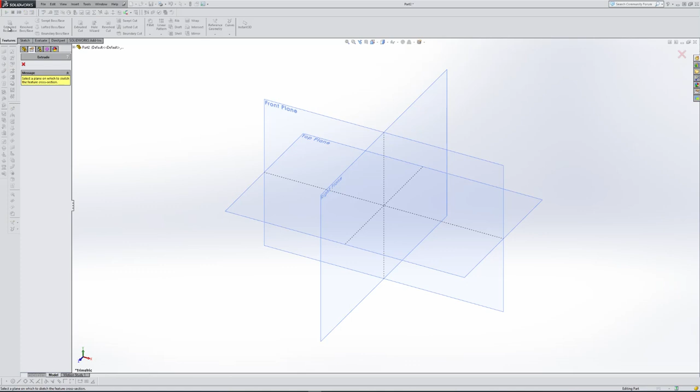First things first, we want to start with an extruded boss base, and I want to select the top plane. Right in the top plane, I'm going to grab a circle command. I want to place a circle about in that general area, and I want to make that one for construction.

Now I want to add 3 more circles. I'm still in the circle command. The next circle I want to add is right up at this top node. I'm going to place one here, somewhere in this general area, and then somewhere in this general area as well.

Now what I'd like to do is add some relations. This one is still selected as baby blue, and then I pick this circle and then this circle here, and I want to make those equal to one another. I also want to add another relation between this one, and I want to make those horizontal. So when I make them horizontal, they're going to force themselves around this way.

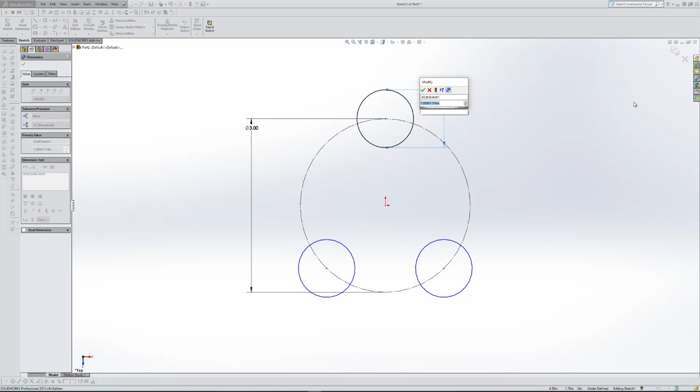So I want to add some dimensions to this. The reference circle is 3 inches. These pads were 1 inch, and now they're 120 degrees apart. I pick this circle, I pick our origin, and I pick this next circle, so it selects the center point of each of them. I want that to be 120 degrees, which keeps our location.

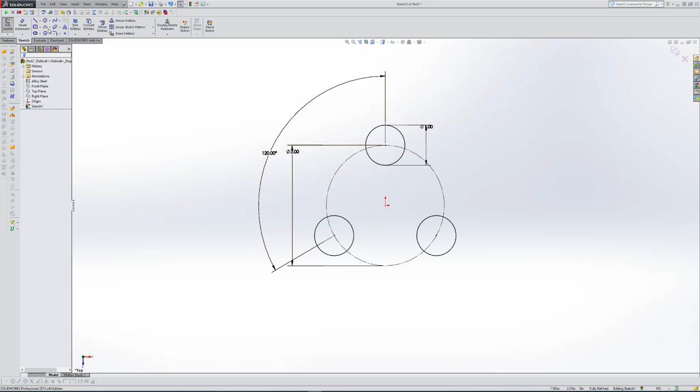So now we've got 3 individual features out here - 3 individual sketches, or 3 individual areas that we would be able to extrude from. But I want to add some more geometry to it.

Let's come up and pick another circle, and I want to draw it in this general area, and then this general area. Now let's add some relations to those. This one's still baby blue, it's already selected. I'll pick this one and pick this one, and I'm going to make those equal.

Now I'm going to work my way around clockwise. I'm still in the add relations command, so I want to pick this first circle, or second circle that we drew, and then this one. I want to make it tangent, working my way around clockwise. If I pick something completely independent, it selects what we did and goes on to the next thing.

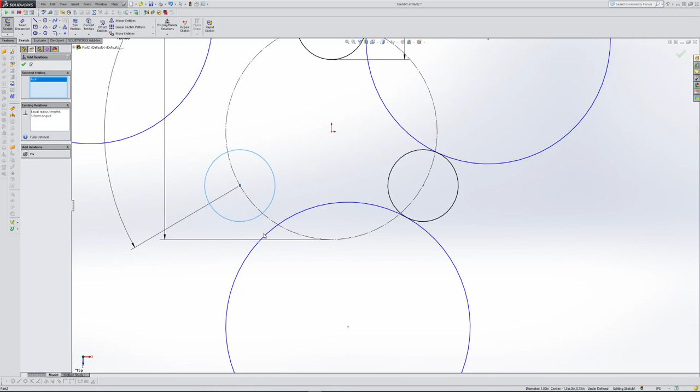I want to make this one tangent as well, and we continue to work our way around. So that one tangent, and then we want this one and this one tangent, and then this one and this one tangent, and the last relation is from this circle to this circle as tangent.

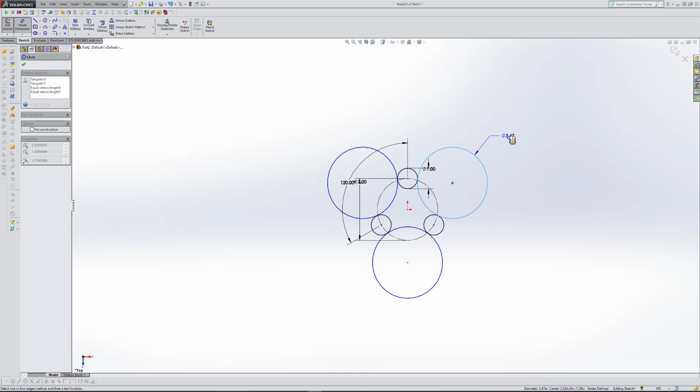Now we're not fully defined, so I think we need one more dimension on here. Select a smart dimension - best to remember this was a 3-inch radius as well. I'm going to pick this circle and make it 6 inches in diameter, so we'll have that 3-inch radius. So our sketch looks something like this.

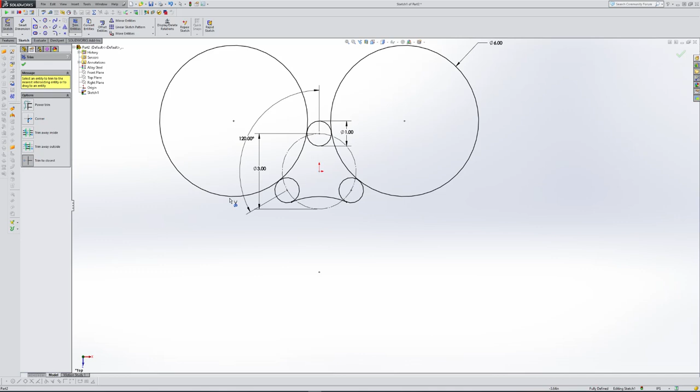This is kind of a mess over here on this side, but we can get the idea of what we're doing. So let's trim some of these features off. So I'm going to come up and select the trim command. The one I like to use the most is trim closest. It just seems like it works best for me. So I'll select that, work my way around clockwise, and pick those.

Now when I zoom way in on this thing, I want to pick these inner portions of these circles, because I only want one enclosed sketch profile. I'm going to work my way around clockwise. If you look here, even this little reference bolt circle, it allowed me to trim here as well. So it's used as some construction geometry, so it kind of helps you trim things off if you need them. And in this case, it added a little bit of work.

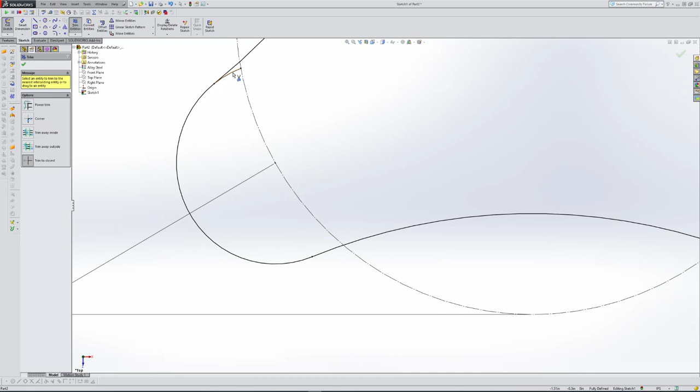So I want to select this, trim it, trim it. I like working my way around clockwise. Trim it, and then trim it, and trim it. So now we have one closed profile. So we're good to exit our sketch, and we want to extrude this material. So let's make this extrusion 0.25.

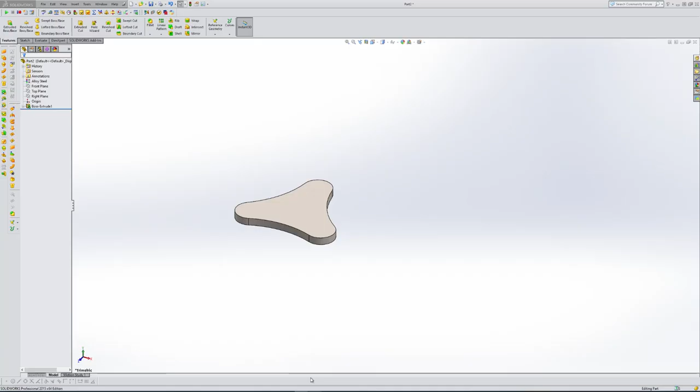Then the next thing that we had was these pads on here. So we look at this, and our pad is 0.375 thick, and it's also 1 inch in diameter. So let's come up, and we want to select extruded boss base. I want to pick this top surface. It should orient normal to you if your settings are the same. So I want to pick this face. I'm going to tickle that edge, place a circle out here, tickle this edge, find my center point, place it there, tickle this one, find my center point, place it, and now I want to add a relation.

So this one is still selected. I want to add this one, and this outer edge, and I want to make all of those equal. So we should be fully defined, and we are. So I look down here, and we are fully defined. It looks like we're here as well because everything went from blue to black. So when I exit this sketch, these pads should be increasing. So we already extruded material 1/4 inch up, and we want to make sure that we just add 0.125 to it to give it our 0.375. So we go ahead and accept that.

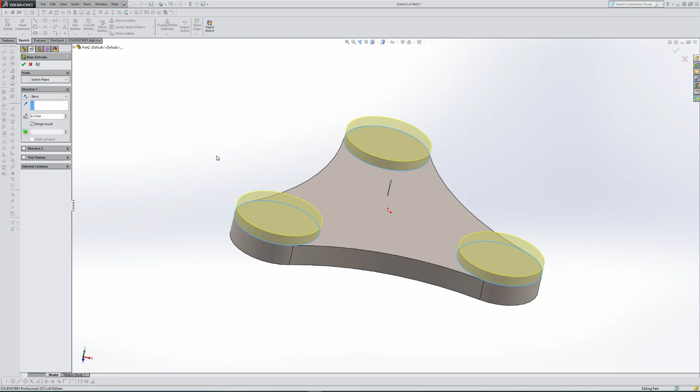Now the next thing that we can do is this boss feature on here, like this big tall portion of it. So dimension wise, it looks like it's 1 1/4 inch in diameter, and it looks like it's 1 3/4 inch from the back side of it. So we got 1/4 inch, so we really just need to add 1.5 if we start on this top surface.

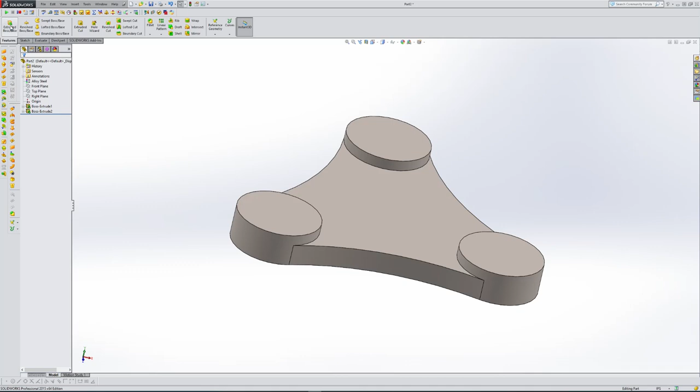So let's select extruded boss base. I'm going to pick this top surface. I'm going to pick a circle. I'm going to place it here. I need to give it a dimension of 1.25. We're fully defined. We're ready to extrude. So I exit my sketch. So instead of it being 0.125 here, this time we want it to be 1.5. So that should give us an overall height of 1/4 inch plus 1.5 at 1.75.

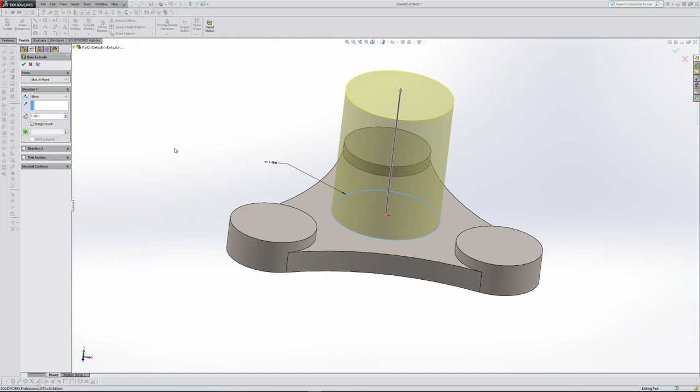Alright, so now we've got these holes that we want to put in here. So let's come around and take a look at this. So we have a 0.4375. I know that's fractional, so it's going to be 7/16 of an inch. Here in the US, we're still stubborn and we still use fractions. So let's go ahead and place those holes. So let's come up to our hole wizard.

Select the hole wizard. This time we want a simple hole, ANSI inch, fractional drill size, 7/16 of an inch. Now if you don't know your fractional sizes, you can actually check this or uncheck this, and it will show whatever your decimal sizes are. So 0.4375 is what we're looking for. Now we've got all of our parameters. We don't want a near side countersink, so make sure all of that is deselected.

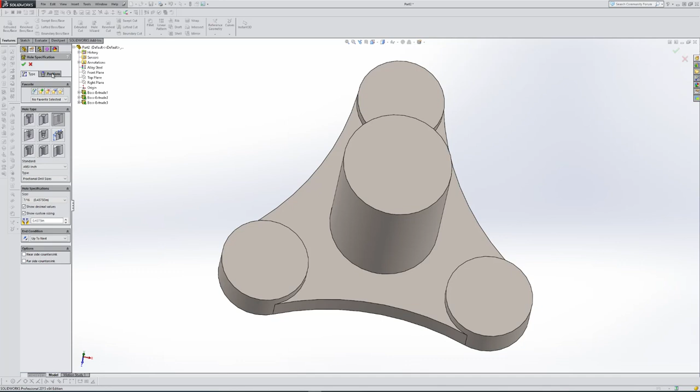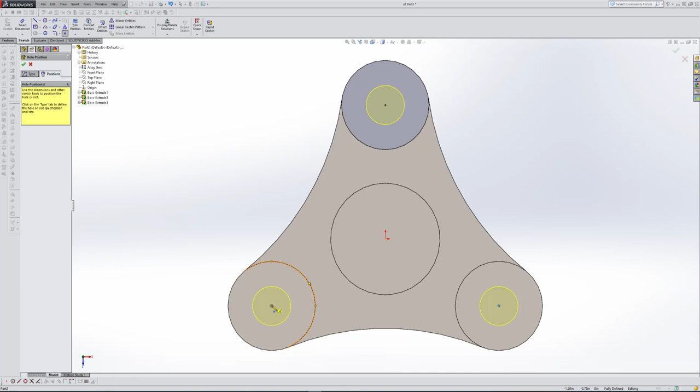So position wise, it's asking where we want them. I'm going to place it on this face. I'm going to use my Control-8 command where I can see what's going on and kind of show you a little bit better. So I'll tickle the edge of this. I find the center of this circle, and I'm going to place it in the center. Same thing down here in the center, and the same thing here in the center. So I accept it, and now we have these 3 holes. One thing that we need to look at is we have a counterbore in here. Let's go ahead and place our counterbore in here.

So as I'm looking at this, we've got a 1 inch diameter spot face, I guess, instead of a counterbore. So we got a 1 inch diameter, 0.125 depth of the counterbore, and a 1/2 inch all the way through. Alright, so come back to your hole wizard. Instead of it being a simple hole, we want to select a counterbore. Not too concerned with what type it is. We're going to use custom sizing.

So custom sizing, I want to make sure that my through hole is going to be a 1/2 inch in diameter. I want to make sure that my counterbore diameter is going to be 1 inch in diameter, and I want to make sure that my depth of cut is going to be 0.125. So now the positions of this is going to be fairly important. So we select positions. Make sure nothing else, no countersinks or anything here.

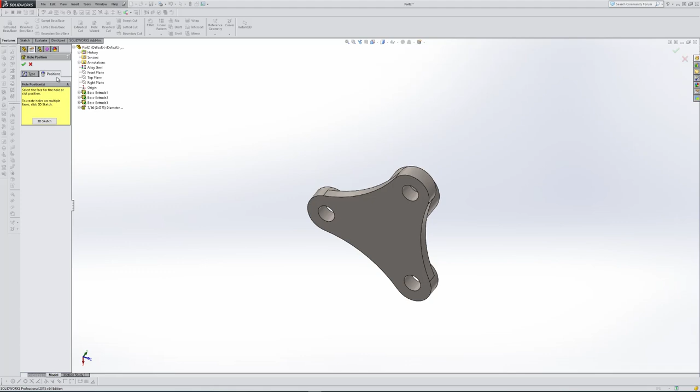So positions, I want to place it on this back face. I'm going to use my Control-8 command to kind of show you where we want to place it, and I'm going to use my origin right here to place it. We are now fully defined, and we can add this feature in here. So we now have that in here as well.

I'm going to use my Control-7 command to make an isometric view out of this, and I'm going to just hover over my planes just to make sure I'm going to use the one that I want. So the right plane, I think, is what we're going to use next in our drawing. So we want to put this little chamfer on here, and it's going to intersect in the center of that hole right there. So let's come back to our model.

I want to come select the right plane, and I want to create a sketch. See the little flyout? So I can just take that shortcut, select sketch, and now I want to grab a regular line. So I'm going to come to this top edge and this right hand edge as well, and now I want to use some dimensions. So pick the line itself, and that was 1/4 inch, and it was also 45 degrees.

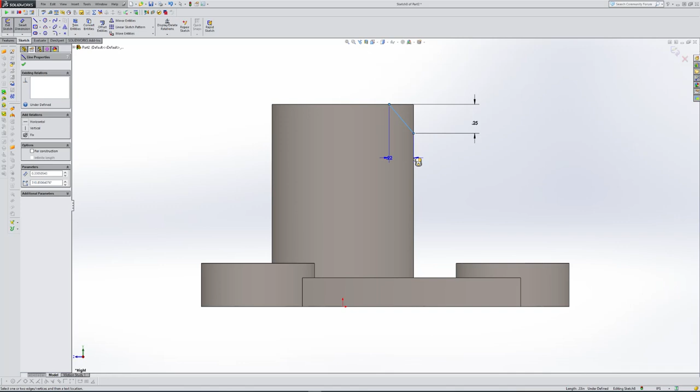So I pick that line, and then this edge, pull it up, place it down, and it's 45. We are fully defined, and all we need is that one line. It's like cutting it with a cutting plane or a surface. So let's come up here. I didn't select cut to begin with, so I'm going to come select features, select extruded cut.

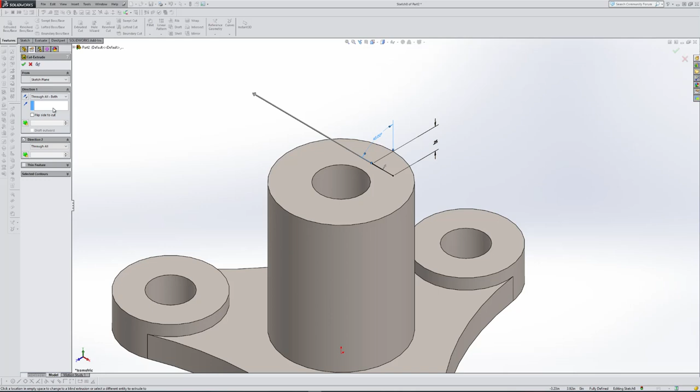Notice my arrow is pointing up, so it's going to remove this material, which is what we want. Instead of it being blind, I want it to go through all both. Kind of rotate it around, and it's what I want, so I accept it. And we now have that surface that we can add our next feature on. So our next feature is going to be in this little auxiliary view that we have here.

Looks like we have a diameter of a 0.070 drill with a 0.120 countersink at 100 degrees. So let's go ahead and select those parameters. Now we want to come up and grab a simple hole again. So we select simple hole, instead of it being fractional sizes, we want all drill sizes. We still need to know the decimal values because I don't remember all of these things, but we know that we're way too big now. So I'm going to roll this up until we get to 0.07.

And it looks like it's a number 50 wire drill size. I do want a near side countersink. I don't want my countersink to be 1/50. I do want it to be 0.12, and I also want it to be 100 degrees. So now my positions, I'm going to come up here and place my positions. I want it on this face.

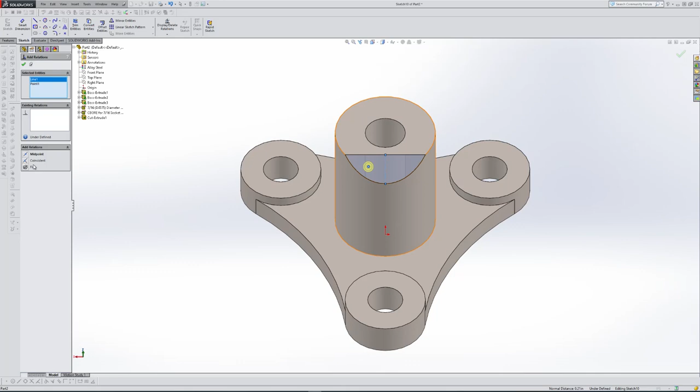I'm going to use the Control-8 command. Tickle this, and I'm going to place it. I'm going to move it over here because I'm not exactly sure where I want it. So now I'm just going to draw some reference geometry. So I come to this midpoint, and then I come to this midpoint as well. Now I want to add a relation. I want this circle and this line to be coincident.

And then our dimension from this edge was 0.18. So I want a smart dimension from here to here of 0.18. Now we're fully defined. One thing I forgot in the type, I want this thing not to go through everything, but what I want it to do is I want it to go up to next.

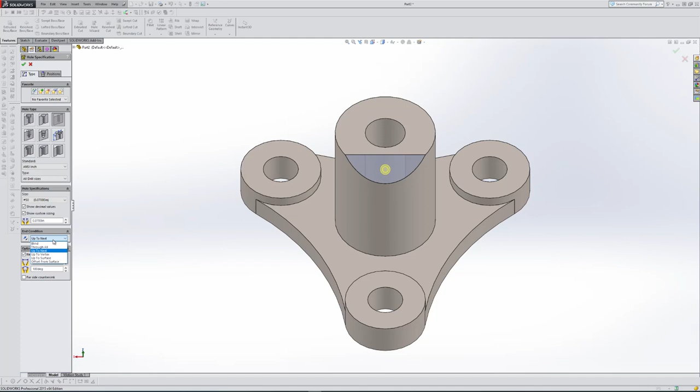Right here it may be a blind depth, through all, or up to next. Up to next is what I want, so it should just poke a hole right in there. So I'm going to go ahead and accept it.

Now our model's getting really close to finished, so we want to come down here and take a look at this. We've got a note down here: all radii are 0.12 unless otherwise specified. So we've got these fillet radiuses here. If we look, we got them here, here, here, and here. It looks like we have 4 of them we have to place on here.

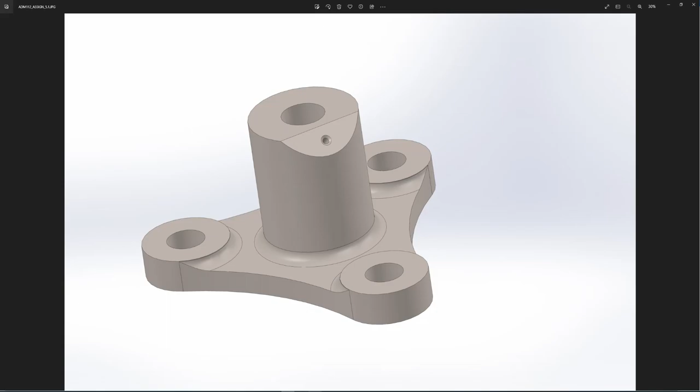So let's come up and select fillet. Our size is going to be 0.12 or 1/8 of an inch. So we place it here, here, here, and here. And I do believe that we're done with the model itself.

So we need to make sure that we save it so we can create a drawing. So I'm going to save this. I'm going to call it junk. So now that we have it saved, we want to create a new drawing, or make a drawing from part. So File, make a drawing from part.

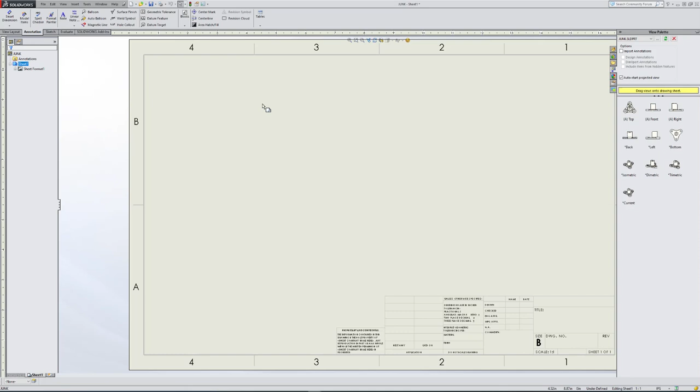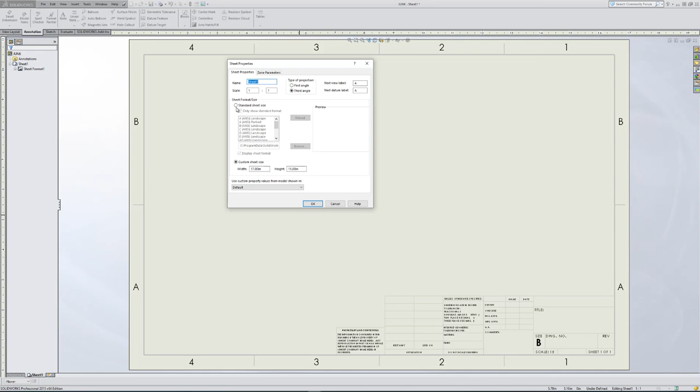Now I'm going to get rid of my title block. So I'm going to come up here to Properties, and I want to go Custom Sheet Size, and I want to lose the title block. I want to lose the title block. Alright, so I don't have a title block.

So now I'll come over here to the views. So I'm going to drag my top view over here in this general area. And does it look like this? Looks pretty similar. So the next thing I want to do is I need to create this section right here. Alright, so let's go ahead and do that.

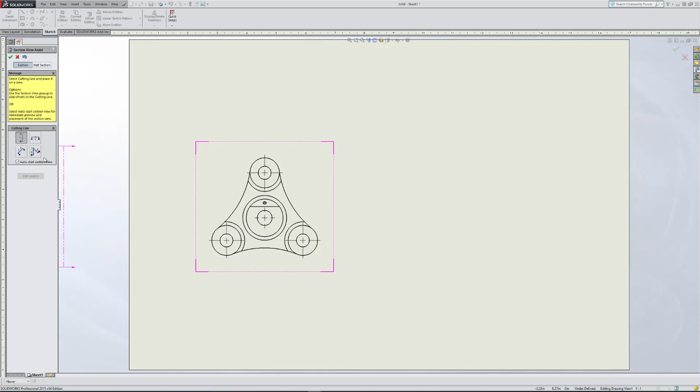Come up here to View Layout. We want a section view. I'm going to select this aligned view. I'm going to place it right here in the center of my part. The next thing I want to do is I want to place it here, and my third leg I want to place in the center of this as well, and I'm going to drag it over here. So what this is doing is really truly opening this thing up to 90 degrees where we can see all the inside features that we have here.

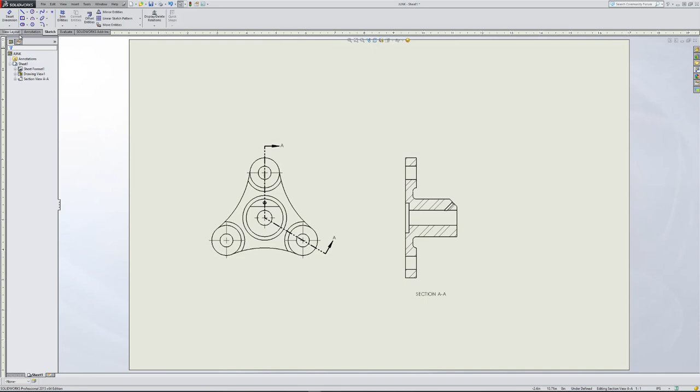So now the next view that we're going to have is an auxiliary view. So I want to select an auxiliary view, and I want to pick this face here, and I want to place it up and put it down. So we'll drag this, so we're looking at that right there. Now I'm not showing my reference circle here, but I want it to be associative.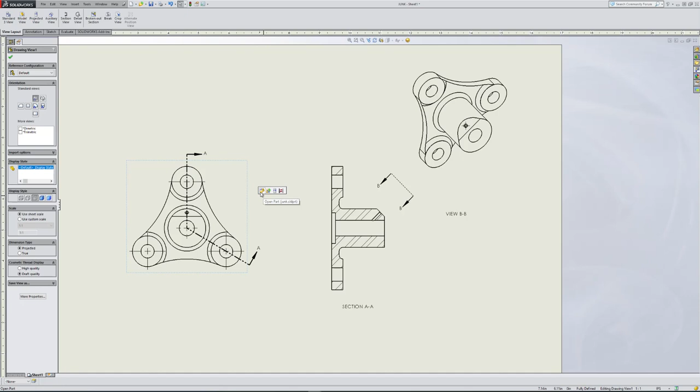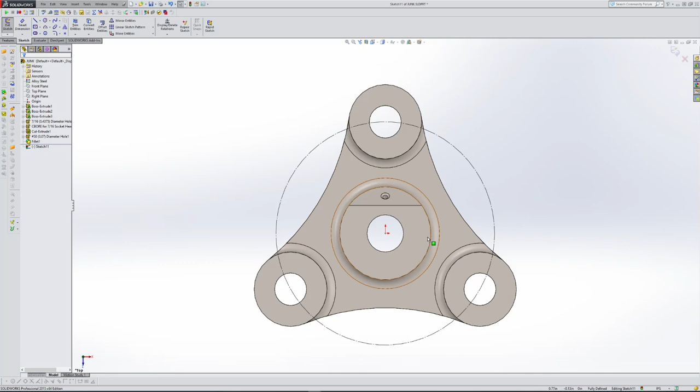So I'm going to open up my part file again. I want to come to the top plane, and I want to create a sketch. So with that sketch, I want to use a circle, pull it here, place it up, put it right there on the center of that, and I want it to be for construction. So that circle should be fully defined because we developed it by 2 points on a plane, which actually generates that third point to develop that circle.

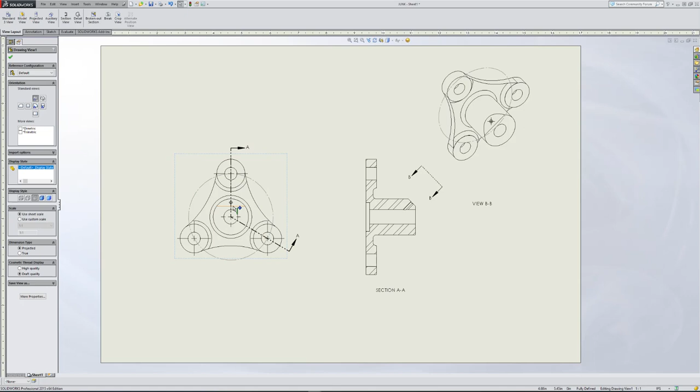So we now have this reference sketch out here that is visible, and we're going to leave it visible. But when I go back to our drawing, it's not going to show up. Why is it not going to show up? I need to come over here, right click, and I want to reset sketch visibility. So it now shows up. One of the problems that I'm going to have is it's showing up in this other auxiliary view.

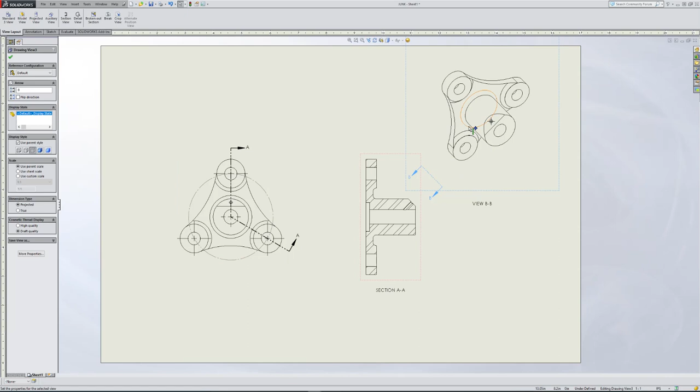So I want to go back to my model. So when I go back to the model, I can now hide that sketch. I can then show this model. Since this is associated with this particular one, I now have this one showing, but I can come over to this view, and it's related to it, but it's more of a child, so I can actually hide that from this particular view and still keep it in this view. So I can use that as our bolt circle.

So now we're ready to start dimensioning. So this, place it down, and I think it was B.C. So we look at our drawing. We have a 3-inch radius here.

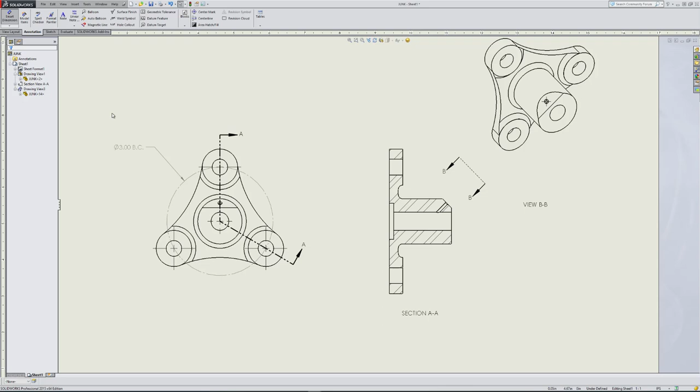We have typical, this dimension down is typical.

Then now let's look at our hole callout. So we're going to select our hole callout, place it here. Well, it says that it's 3 times 0.44 through. That's all well and good, but our decimal places are slightly different. Notice how it says 3 times the diameter of 0.4375.

So we want to come over here. Our diameter is this, so we want to change this to 4 decimal places. So we go ahead and accept that. So we have 1, 2, 3, 4 dimensions on this side, so now we're ready to start dimensioning on our right side view. So let's come back over to our drawing.

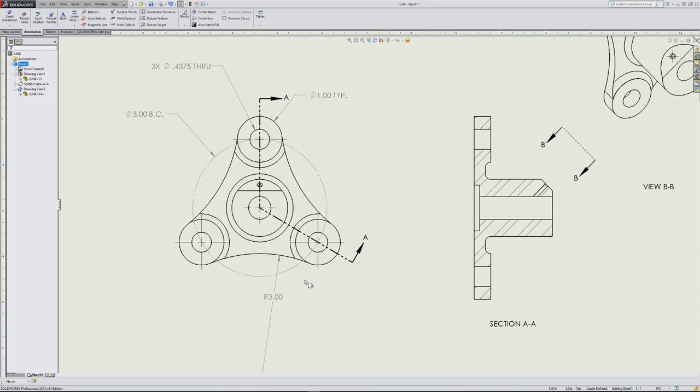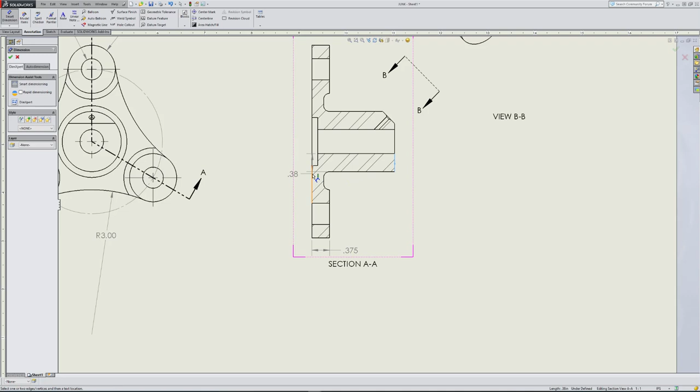So smart dimension, I want to place this one here, but I know that that one is 3 decimal places. And then we got a dimension from here to here, 1.75. Now I don't really like this being in between those, so we're going to move it down.

Up here we have from this flat to this, which was 1/4 of an inch, and then we have this, which was 0.125. I think it was 3 places. It was 3 places. So we want to make sure that this one is also 3 places.

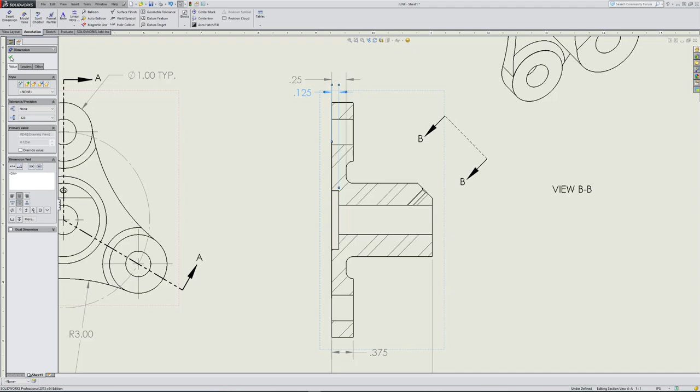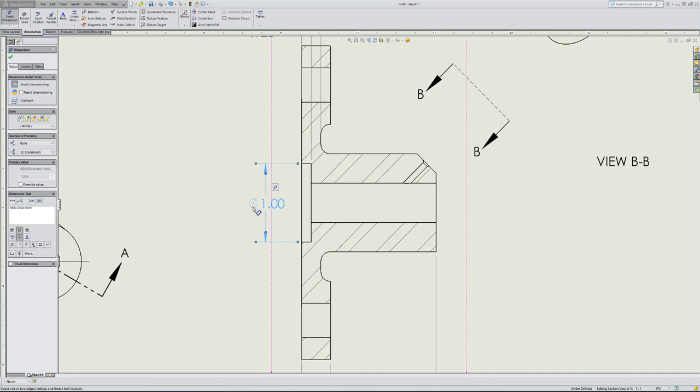Alright, so what are we missing? So we need the counterbore. We need this size. So we need this, this, this, this, and this. So we need 1, 2, 3, 4, 5 on this view. So I'm going to smart dimension. Pick here and here. Shows me my diameter. Pick here, here. It's going to show me my diameter.

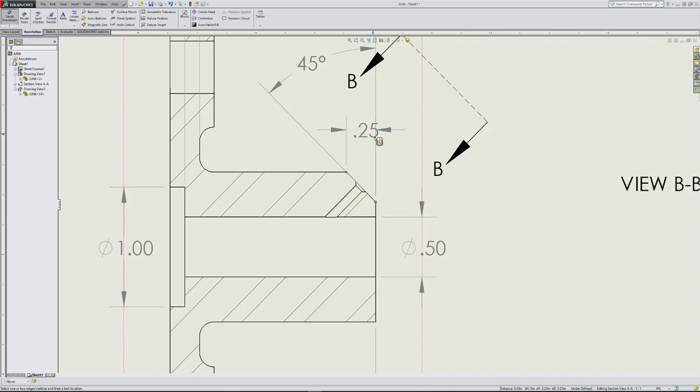I need this angle dimension. Now 45.00 degrees, we really don't want that. We want to change that to none. And now we want a smart dimension from this point to this point. Pull it out, place it down. You can pull it up or out or this way, so just make sure whatever quadrant. Now just get it placed. You can move it wherever you want after the fact, okay?

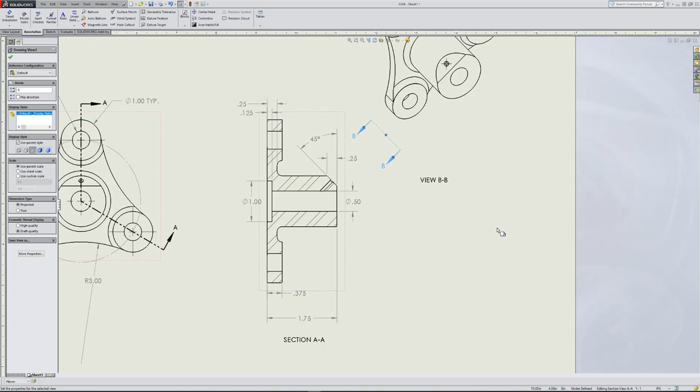Now this is in the view, so I'm going to use my escape key a couple times, just kind of move it out of the way. So we have 1, 2, 3, 4, 5, 6, 7, 8. So we look at the drawing. 1, 2, 3, 4, 5, 6, 7, 8, 9. What are we missing? Oh, we're missing the big diameter right here. So come up, select your dimension. Smart dimension. Pick this and this. Place it down, and we now have our diameter dimension, and we have all these others as well.

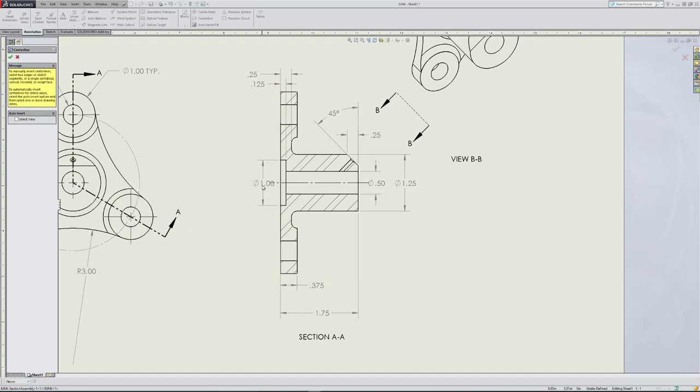Alright, so one thing that we don't have is a center line, so let's pick our center line. Pick that. Now when you pick your center line, look at what happened to your dimensions. That thing crossed over, so we want to move this out and away, and we want to move this out and away as well.

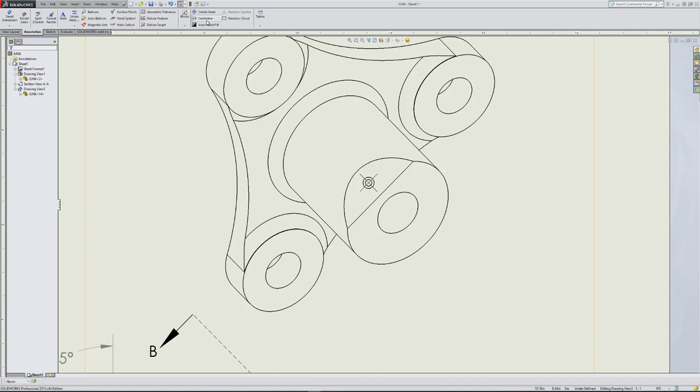Alright, now on our auxiliary view, I'm going to click on this, and I don't really like the way that that's oriented. I want to change this to 0 so that rotates that around. I also want a center line in here as well, so I pick that, and it shows that we got a center line in our part. Now, what we're going to do here is we're going to add smart dimension. We want to pick this line and this, pull it out, place it down, verify that it's 0.18. It is 0.18, and now we have our hole callout for this right here.

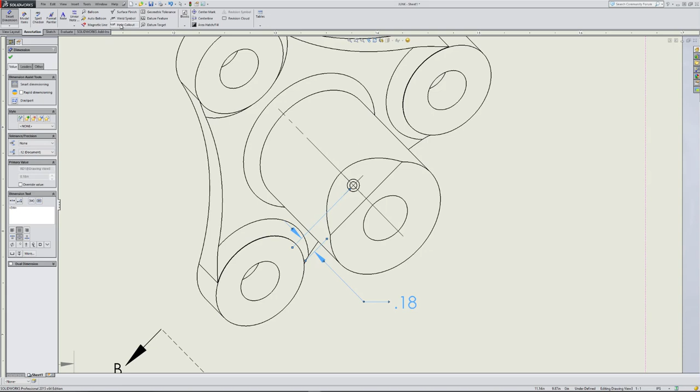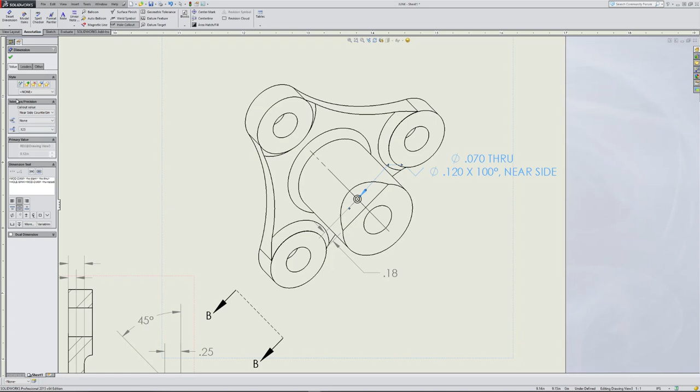So instead of trying to remember all that, let the computer do all the work for us. So we want to come up and use our hole callout. I want to pick this, pull it up, place it down just anywhere for the moment. Looks like the diameter right here is 3 decimal places. So then I can change like the countersink diameter. So it tells you everything that you got right here. So I select it, and I'm going to make it 3 decimal places as well. So that changes all of those. But now it pushed it way off the screen, so I'm just going to move it down here.

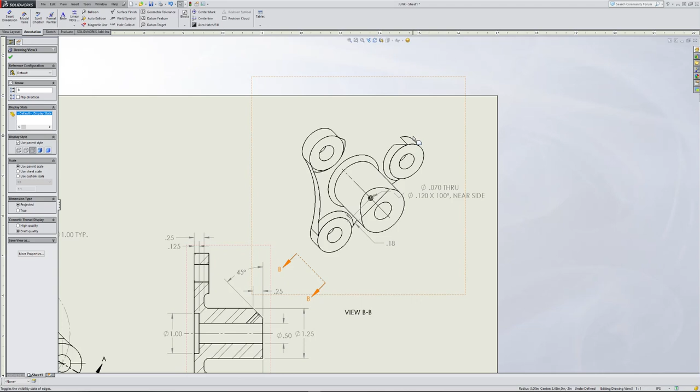Now if you look at the drawing that we were provided, notice there's a lot of hidden information out here. I'm not going to go through all these, but I'm going to show you how to hide some of them. So you click on this line, and you have this hide and show edges. So we click hide and show, click hide and show. So you do that for everything that you have here, and then you want to make sure that you place all of your dimensions. And make sure that if you are required to have the title block fixed, that you go ahead and repair your title block, and you can get that submitted in our learning management system.